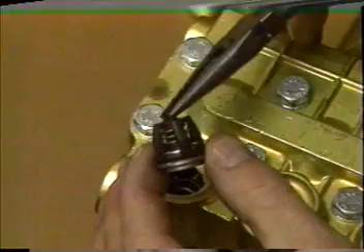This training tape is designed to help you service your General Pump, Interpump. You'll learn how to troubleshoot common system problems, how to spot mechanical problems, and how to service and repair your pump. But first, we'd like you to get to know your pump.

Manufactured in Italy by Interpump S.p.A. and distributed by General Pump Incorporated, your pump is the most reliable of its kind made in the world. These are pumps of innovative design and proven superior performance. The unique Interpump design, with its forged head, multiple head bolts, locked wrist pin, and continuously lubricated dual packing system, has literally changed the manufacturing approach to pumps worldwide.

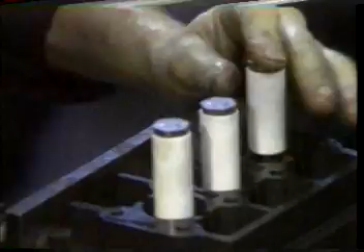And while other manufacturers try to imitate the Interpump design, only these pumps, with over 2 million in use throughout the world, have proven performance and durability. Of course, any mechanical equipment is subject to wear and requires servicing. However, you can be assured that your pump's problems will be less frequent and less serious than with any other pump on the market.

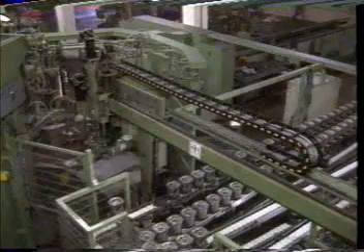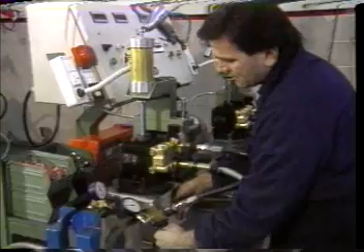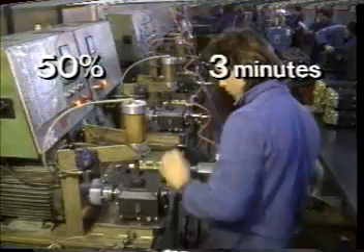The quality of your pump is assured by the method of manufacturing. At Interpump, quality control takes place before, during, and after production. The aim is a failure rate of 0. To ensure such reliability, every pump is thoroughly tested in 3 stages: at 50% pressure for 3 minutes, at full pressure for 4 minutes, and at 30% over the rated pressure for 3 minutes.

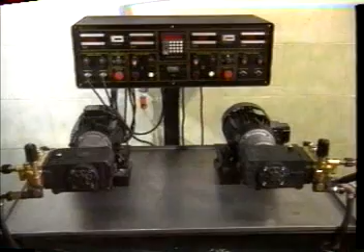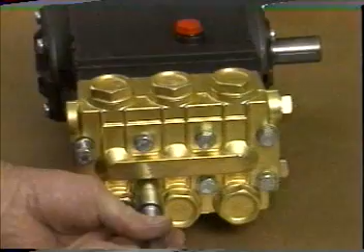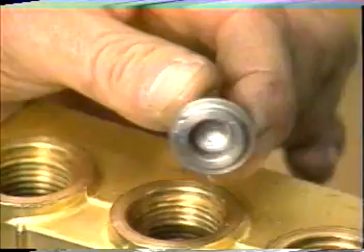One of every 50 pumps is completely examined and analyzed to make sure everything meets exacting standards. Forging and extra mounting bolts make the head twice as strong as cast heads to stand up to high-pressure spikes and freezing without cracking or warping. An inlet-outlet valve assembly with stainless steel valves, seats, and springs, all working within the unique design, make it efficient, quiet, and easy to service.

Minor repair and routine maintenance is simple, thanks to the pump's practical design and pre-assembled repair kits. Your pump can be easily checked, serviced, and maintained with common tools, or even easier with special tools available from General Pump.

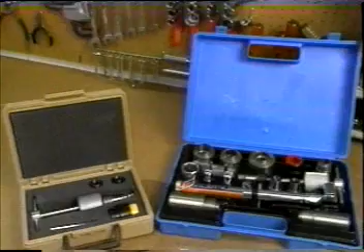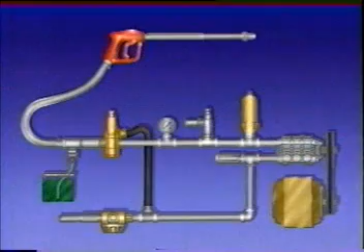In any pressure cleaning system, a high-pressure pump is just one of a dozen or more components. By itself, the pump does not create pressure. It is simply a mechanical device designed to efficiently deliver a specific volume of water with a given RPM. The pressure produced in any system depends not on the pump itself, but more on the source and amount of flow, and the control of that flow between the pump and the nozzle.

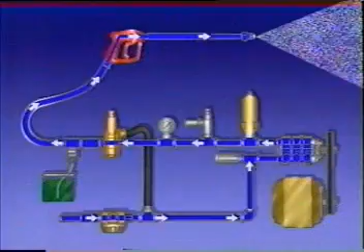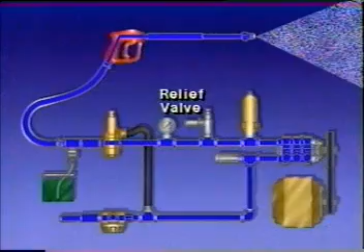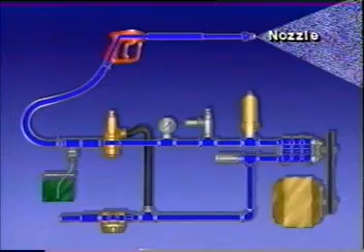Components of the system typically include an inlet water filter, pump and power source, pulsation dampener, safety relief valve, pressure regulator or unloader, chemical injector, trigger gun, and the spray nozzle. Any one of these components can be a potential trouble spot in a pressure cleaning system.

Because the pump is the heart of the system, it is often the first suspect when a problem occurs. But in reality, most problems can be traced to components outside the pump. The pump depends on these components to operate properly. And more often than not, a problem in the pump is a direct result of problems elsewhere in the system.

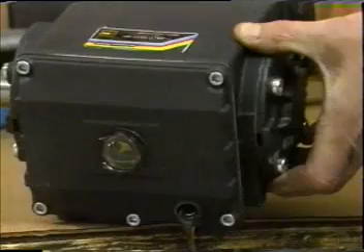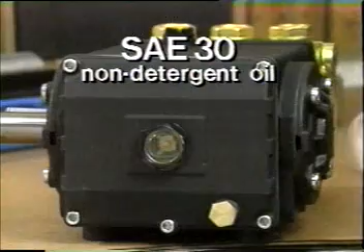As with any mechanical equipment, an ounce of prevention is worth a pound of cure. You can prevent most problems and need for repair with routine preventive maintenance. Much like maintaining your automobile, many preventive measures are simply visual checks of oil and water. Your pump is designed to use SAE 30 weight non-detergent oil. In a new pump, the oil should be changed after the first 50 hours. Thereafter, every 500 hours of use.

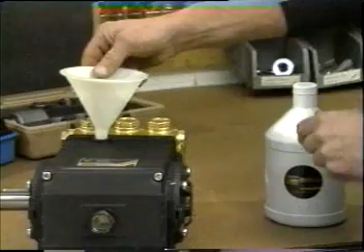We recommend General Pump Oil, which is especially formulated to reduce condensation, foaming, oxidation, and rust. Check the oil regularly by both sight gauge and dipstick. A dark brown oil color indicates contaminated oil, which could signal that it's time for an oil change. If the oil appears foamy or milky in color, it means that water or condensation is present in the oil, and the oil should be changed.

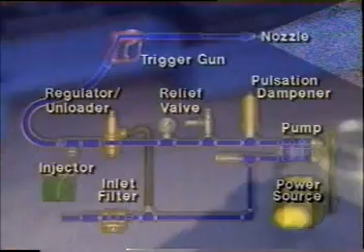As we noted earlier, the pump is one of many components in your pressure washing system. Therefore, it's important that all elements of the system be checked if a problem occurs. Don't assume that your pump is the problem. This can lead to unnecessary and time-consuming work. Begin with this simple checklist.

1. Is the power supply regular and adequate? 2. Is the drive system loose or worn? 3. Does your water supply match the output of the pump? 4. Is the inlet filter clogged? 5. Is the regulator or unloader properly sized and adjusted to the system? 6. Is the nozzle worn or damaged?

If you have checked these items and a problem persists, you should now analyze the nature of the problem and the possible causes. While we will not cover all of the possibilities, these are the most common problems and their probable causes.

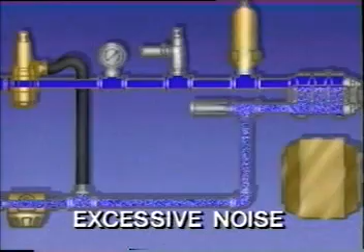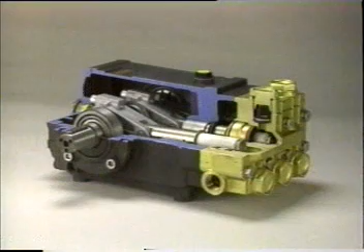Excessive noise is most often caused by cavitation. Cavitation can be caused by an inadequate or aerated water supply or excessively heated water. In most cases, a noisy pump can be attributed to worn valves, contaminated valves, worn packings, worn or loose connecting rods, or worn crankshaft and bearings. However, problems in the power end are rare.

Excessive vibration or pulsation can be caused by cavitation, a faulty valve or packing assembly, or problems in the drive system, faulty belts, pulleys, or loose mounting bolts.

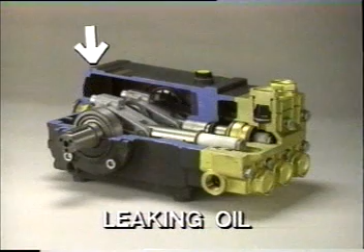Leaking oil is often a result of oil pressurization caused by failure to remove the red shipping cap and install the vented dipstick. Other trouble spots include an overfilled crankcase, leaky gaskets, piston rod oil seals, and crankshaft end seals.

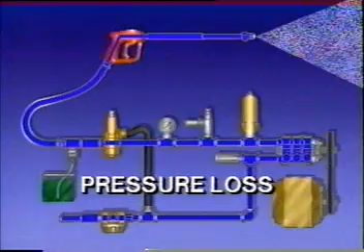Water leaks under the manifold with no significant pressure loss could mean a problem with a cracked ceramic plunger, piston bolt assembly, or excessive inlet water pressure. A loss of operating pressure is a common problem, but most often the cause is outside the pump. A chief culprit and the first component to be checked is a worn nozzle or spray tip.

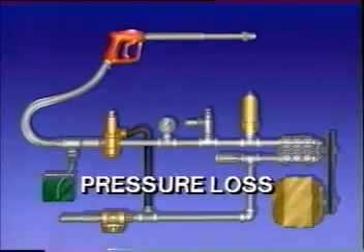Other causes include a faulty gauge, inadequate water supply, running at improper RPM, a faulty or contaminated valve assembly, and worn packings, or a combination of them all. Going through the 6-point system checklist covered earlier will most often reveal the cause of low pressure.

The balance of this presentation will deal with troubleshooting and servicing the various parts of the pump. While your pump may differ slightly from the one used in our demonstration, there is a universal design to the pumps and their components. Therefore, the basic servicing concept will apply to your pump with only minor variations. Refer to your pump's data sheet for exact specifications.

The training is organized in sections by title. You may wish to skip ahead to an area of particular interest to you, now or in the future. For this purpose, use the following menu as your guide. Valve assemblies, packing system, plunger system, piston rod oil seals, power end, crankshaft oil seals, and preventive maintenance.

Your pump is composed of two main areas: the front or wet end, where the water flows, and the rear or power end, consisting of the crankcase and crankshaft assembly. Because problems in the power end are rare, we will concern ourselves mainly with the wet end. The wet end consists of three main elements: the valve assemblies, the packing system, and the plunger system.

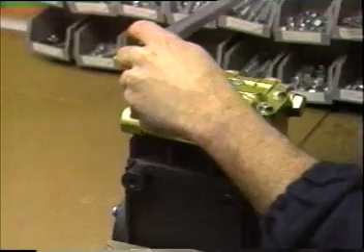Problems with the valve assemblies often occur in a system as contaminants are purged throughout the new pressure cleaning system and flushed through the pump. These contaminants of the manufacturing process include bits of Teflon tape, brass particles, rust, and other foreign matter. The problem can be easily remedied by replacing the valve. Most often, the trouble can be located in the first inlet valve.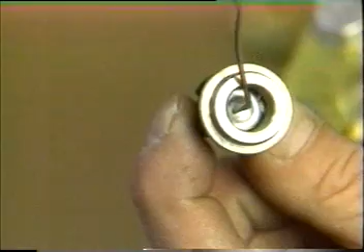Without removing the head, remove the valve cap and extract the valve assembly. Now check closely for the contaminant, which may be lodged between the seat and the valve. Also, look for scoring or pitting. Such signs of wear would indicate a problem of cavitation or excessive heat. Repeat the process with each valve.

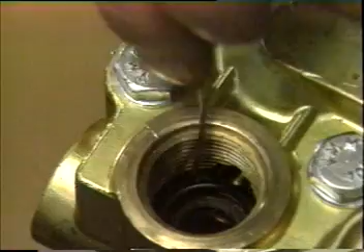While the valve assembly is removed, also check the O-rings for damage and replace as necessary. After extended use, you should expect to replace valve assemblies, for they are a wear item. For this reason, we have made replacement easy with a complete valve assembly repair kit.

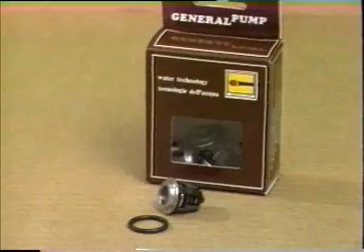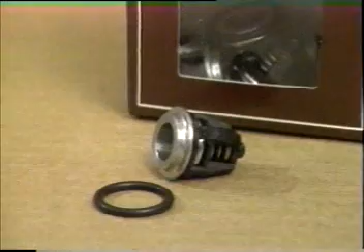One kit is all you need to repair all valves. It includes O-rings, valve seat, poppet, spring, and retainer, all pre-assembled. First, install the new O-ring in the valve cavity. Next, insert the self-aligning valve assembly firmly into the center of the valve cavity. Now replace the valve cap and apply the proper torque. Repeat the process with each valve.

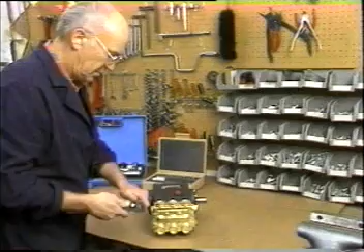To service the packing system, the ceramic plungers, or the piston rod oil seals, you must first remove the manifold or pump head from the crankcase. This section shows how to remove and then replace the manifold for any of these services. To remove the manifold, first remove the pump head mounting bolts.

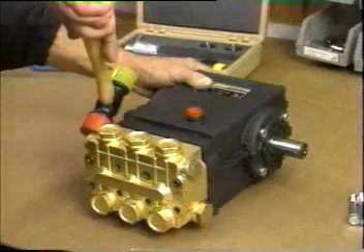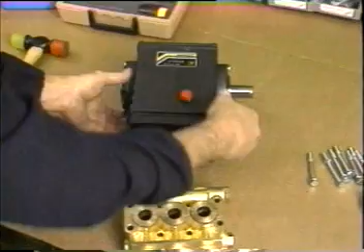Now loosen the head by tapping gently on protrusions with a soft mallet. Pull the head straight off to avoid damaging the plungers. Do not apply any force to the side of the head. Now you are ready to service the packings, the plungers, or the oil seals.

To replace the manifold after service, first coat each plunger with grease and rotate the crankshaft as shown. Note that the center plunger is drawn in, while the outer plungers are extended, forming a stable guide for remounting the head back onto the crankcase. Again, handle the head carefully to avoid damaging the plungers and packings.

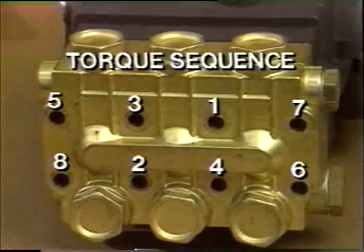Now replace the head bolts following the proper sequence as shown. Use a torque wrench to torque to specifications. Do not over-tighten. To service the packings, first you must remove the manifold as we've shown.

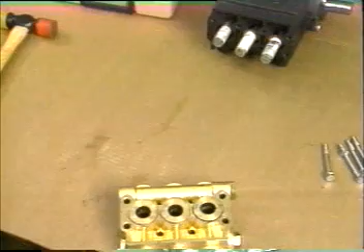Because of a superior design, the packing system is exceptionally durable. Therefore, complete packing system replacement is seldom necessary. Most often, simply replacing the V-packings is all that's required. To accommodate various needs, different packing kits are available.

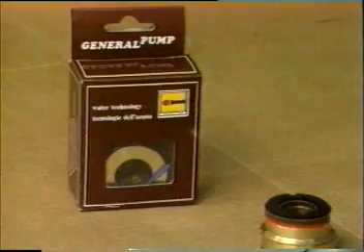A full kit includes front head ring, front V packing, one long life ring, brass intermediate seal retainer, rear head ring, rear V packing, brass main seal retainer, and O-ring. Individual packing component kits are also available.

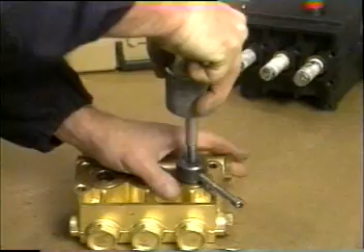To remove the old packings from the head, first insert the proper extractor collet through the main seal retainer. Tighten the collet and extract retainers, V-packings, and head rings. This special extractor tool makes the job easier. If conventional tools are used, be careful not to scratch the brass.

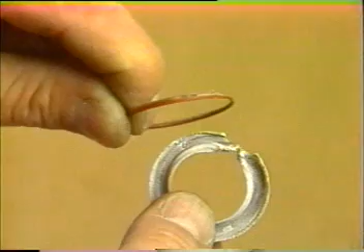Carefully inspect the O-rings, packings, and long life rings. Look for wear and chipping. Chipped or cracked packings are an indication of system-induced wear from heat or cavitation. Examine the brass for deep scoring or excessive wear. Because the brass components are critical to the packing system, failure to replace worn brass parts may cause improper piston guidance

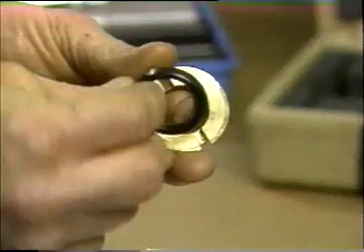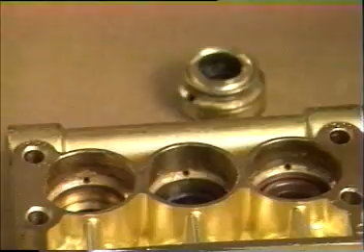and premature packing failure. Now reinstall the parts in the proper order using a packing insertion tool. First the front head ring, and then the front V packing. When installing the long life ring, note that there is a slight bevel to its shape. This bevel should fit snugly over the contour of the packing. This is important to ensure the durability of the high-pressure V packing.

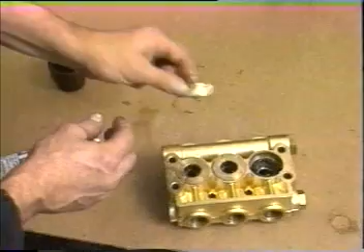Now grease and install the intermediate seal retainer and the rear head ring. Now replace the rear V packing in the main retainer and install the main seal retainer with O-ring into the manifold. Thanks to the unique Interpump design, no additional adjustment to the packing is necessary. Finally, reinstall the manifold head as we've shown.

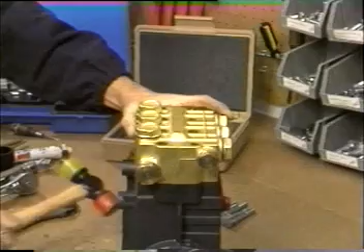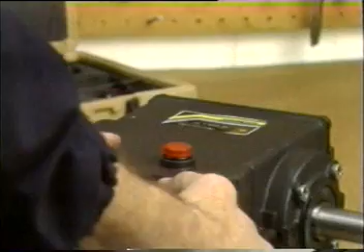Before doing any disassembly, examine the pump closely for evidence of a water leak or an oil leak between the wet end and the power end. A water leak would indicate a cracked ceramic plunger or a leaking piston bolt assembly. An oil leak would indicate worn or damaged piston rod oil seals. To service the plunger system, first remove the head from the crankcase.

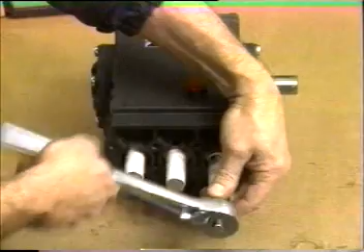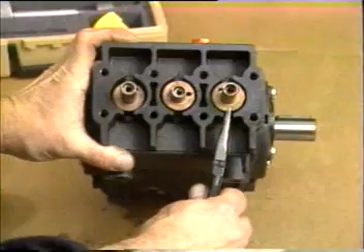Now remove the piston bolts from each of the ceramic plungers. Gently hand turn the ceramic plungers and remove them. Now carefully remove the copper slinger washers. Examine the washer closely, looking for signs of wear or damage. With the slinger washers removed, inspect the pistons for water stains which could indicate a cracked piston. If a crack is found, replace the ceramic plunger.

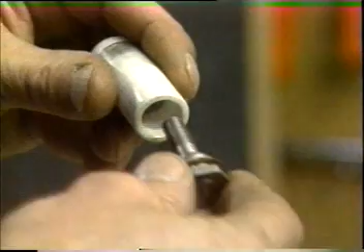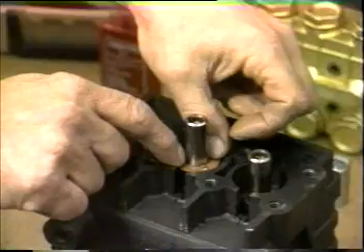After you've inspected the washers, piston bolt assemblies, and ceramic plungers, and corrected any problems, replace them in reverse order. Whenever the plunger bolt system is removed, the copper washer and slinger should be replaced. Carefully insert the new slinger washers with slot down, then each ceramic plunger.

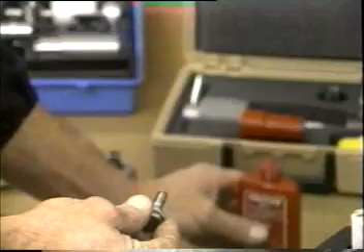Before replacing the piston bolt assembly, apply a small amount of Loctite number 271 to ensure proper seal. Hand tighten and then torque to 14 foot-pounds. Use a torque wrench. Do not over-tighten. Now replace the manifold as we demonstrated earlier in this videotape.

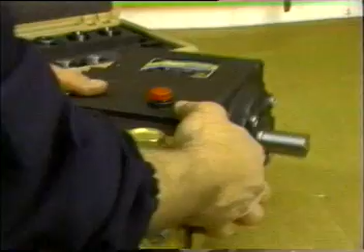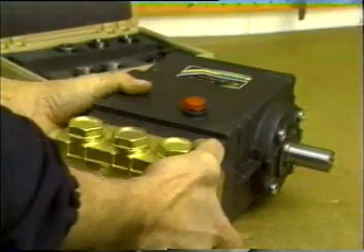If you detect an oil leak in your initial inspection, the problem may be with the piston rod oil seal. The piston rod oil seal can only be replaced with the ceramic plunger removed. First, carefully remove the manifold. Then remove the piston bolts, ceramic plungers, and the copper slinger washer as we demonstrated. Manually rotate the crankshaft to draw the piston rod into the crankcase as far as possible.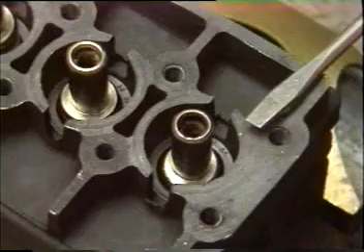Insert a small straight blade screwdriver under the inner lip of the piston rod oil seal, being careful not to scratch the piston rod or oil seal bore. Rotate the screwdriver into the oil seal. Now turn the crankshaft so that the piston rod moves away from the crankcase. The oil seal will be pulled from its seat.

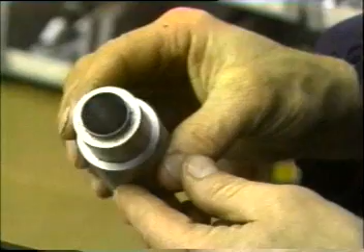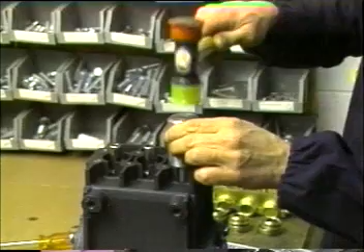To install the piston rod oil seal, use an oil seal insertion tool or an appropriate deep well socket that clears the piston rod. Lubricate the new oil seal and carefully place it over the piston rod. Use a socket or oil seal insertion tool to set the seal in its seat. Repeat the procedure for each piston. Whenever the plunger bolt system is removed, the copper washer and slinger must be replaced. Now replace the plunger assembly and the manifold as we demonstrated.

The power end, consisting of the crankshaft assembly and crankcase, is more complicated and more challenging to repair than the wet end. Fortunately, the power end is also much less likely to have problems and need repairs. Problems with the power end are rare because the pump is designed for maximum durability.

All General Pumps feature a large capacity cast aluminum crankcase, large full-contact connecting rods with a locked wrist pin of proven durability, oversized ball or tapered roller bearings, a non-elastic forged crankshaft, and hard chrome-plated piston rods. Problems in the power end, while rare, usually require special tools and equipment. If service is needed, please consult your General Pump U.S. representative. An oil leak in the power end indicates that the crankshaft oil seals need to be replaced.

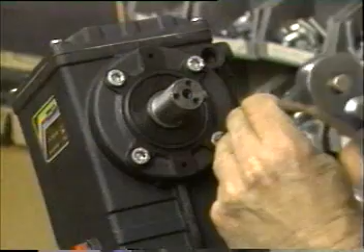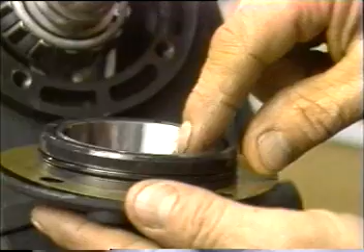To replace the oil seals, remove the 4 screws that retain the crankshaft cover, and with a flathead screwdriver, remove the cover, taking care not to scratch or nick the brass shims or the crankcase. Remove and examine the bearing cover for any cracks or imperfections that would cause an oil leak. Keep the shims in proper order for reassembly. Now examine the O-ring seal for cuts and abrasions and replace if necessary.

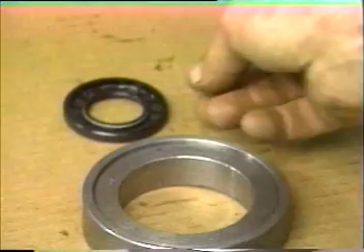Using an arbor press or appropriate socket, push the crankshaft oil seal out, taking care not to damage the bearing race. Press the new crankshaft oil seal into the cover, facing the same direction as the one you removed. Oil seal lips always face the oil reservoir.

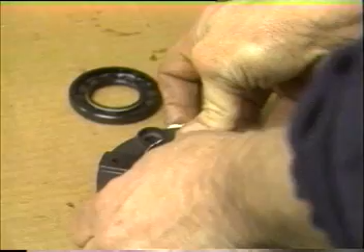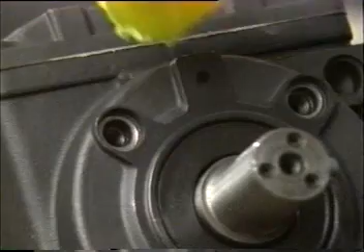Now reassemble the crankshaft cover, making sure the shims are replaced in the same order in which they were removed. Follow the torque sequence as shown. Torque to 15 foot-pounds using a torque wrench. Do not over-tighten.

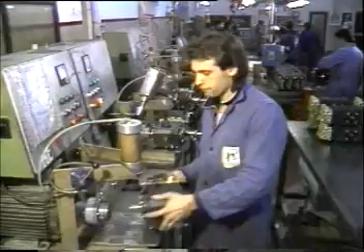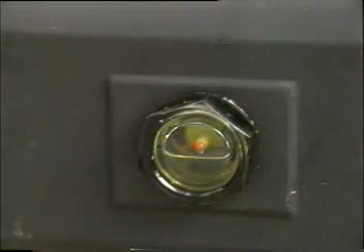Your pump is designed and built to serve you well with dependable performance and uncommon durability. Properly used and maintained, it should give you many years of trouble-free operation. But like any finely tuned machine, it requires regular care and an ongoing preventive maintenance program. Regularly monitor your oil sight gauge and dipstick for dirty or discolored oil. Change the oil every 500 hours. Watch for signs of condensation in the oil.

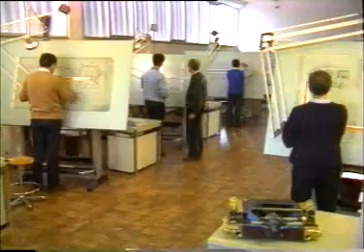If and when servicing is necessary, follow proper procedures as outlined in this training film, taking care not to damage any parts of the pump during the servicing. You have the finest pump of its kind in the world. Designed and manufactured by Interpump S.p.A. and distributed by General Pump Incorporated, your pump is built to last and designed for easy maintenance.

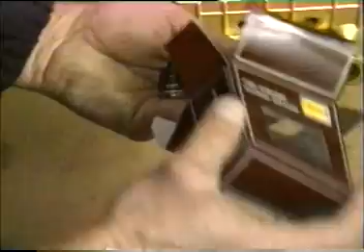Although occasional servicing may be necessary, you can count on more years of uninterrupted service from a General Pump than from any other pump on the market. When it does require servicing, superior practical design and pre-assembled repair kits make the job easy. Interpump and General Pump, proven quality pumps, designed and built with you in mind.